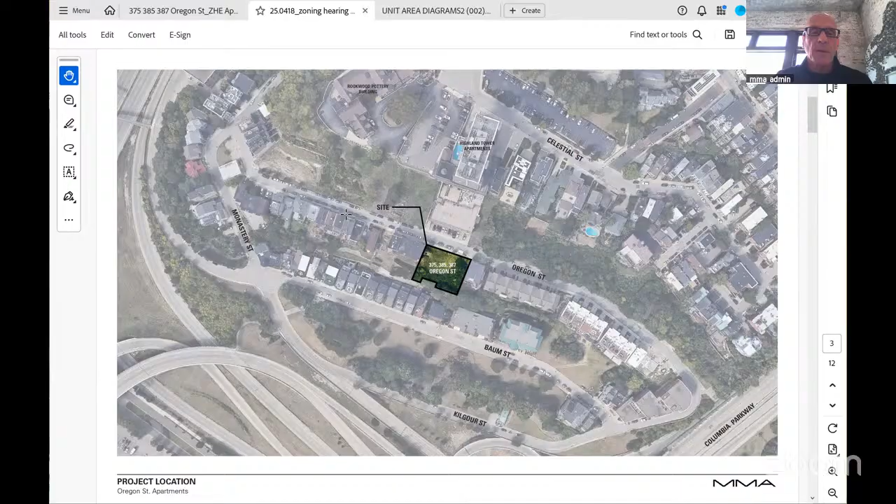So just orienting everybody from a site standpoint, we kind of all know where we are here on Oregon Street. The Highland Tower sits directly behind us, Baum Street is down below. I see we have some neighbors there on screen, and then Kilgour on down. So as was just beautifully explained from Athena, I think everybody kind of knows where we are and what we're talking about.

Getting down into the weeds a little bit from the zoning standpoint, this is where RM7 sort of starts and stops from an overlay standpoint, and then we go down to an RM2. For that purpose, from a zoning standpoint, it's just a matter of we are in the high density build area versus the lower or mid density building area further down on Oregon Street.

In general, just to give an orientation of how this sits in plan and on the site, Oregon Street is to the top of the screen up here. The general layout and massing of the building in plan is noted on the drawing, following the thick line. It's a bit abstract if you're not familiar with the building, which is still in design phase, but geared towards zoning approval first. We actually have three areas of entry into the building, each of which accesses 4 different units, which will then conform to the building code as far as the number of egress units permitted in one avenue.

So essentially, we have a large building mass overall, and it breaks down into two bigger towers that step off the street, and then one where you descend down between the masses and access 4 units down below.

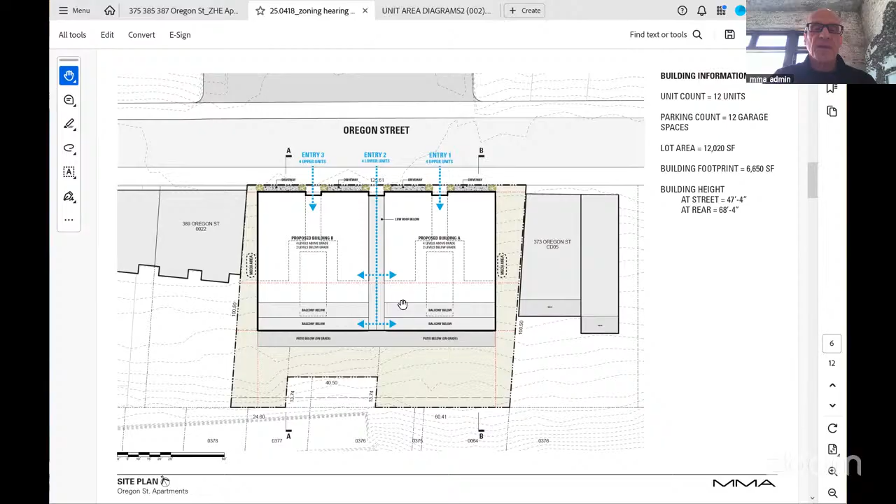From that standpoint, this shows, sort of removes a few things and shows the overlay. This highlights 2 of the conditions of relief. One is the rear yard setback, all the calculations noted here. The original position would have placed us here, which would have aligned more up with here, but certainly lost some space over here. So the averaging of this through the Hillside Overlay District, with both our staff, Brian Raymond and Matt Lascheid from the zoning department, and their algorithms, these were the numbers that were calculated and approved.

So we're looking for a setback that puts us into the zone so that we can build to here underneath. And then from a parking standpoint, another one of the items listed, the proposed aggregate width located here at 64 feet. I'll show you in a moment why we think that should be allowed. It's really because of how we're trying to make the buildings sit themselves on the street and how they address the street.

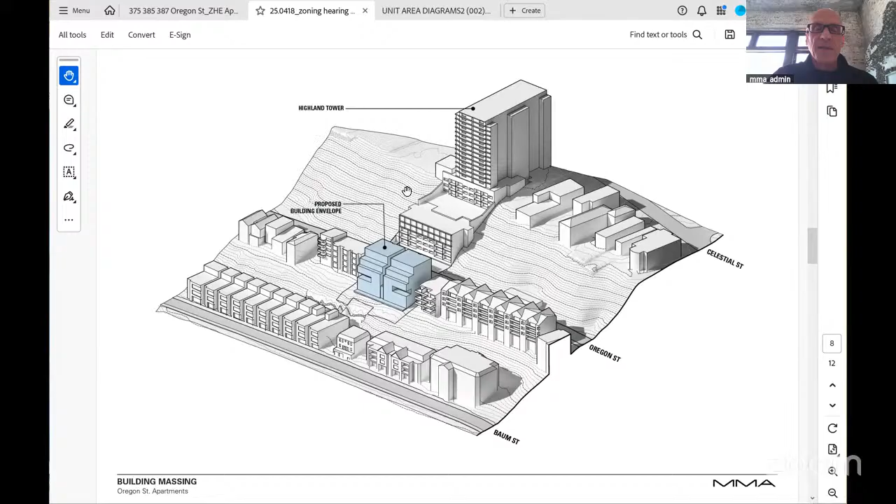So a little bit of an overview, just an axonometric. The proposed envelope is located here, pretty abstract early on, but this is about where the zoning heights and so forth are located and requested. You'll note behind us the Highland Tower, stepping down to, I believe, condominiums down there on Oregon Street.

From a street standpoint, to highlight again where we took what is essentially a larger building mass, the primary floor that is shared is the first floor off street. We've broken that down into 4 different access points for the vehicular condition, of which, and the issue of the dimension, the 64-foot dimension on the parking and drive access, this is cumulative. But we actually feel there's an advantage here, because where we set the massings now, as we break it down, it feels more like a row house on the street, matching up with some of the other ones further down in a different district.

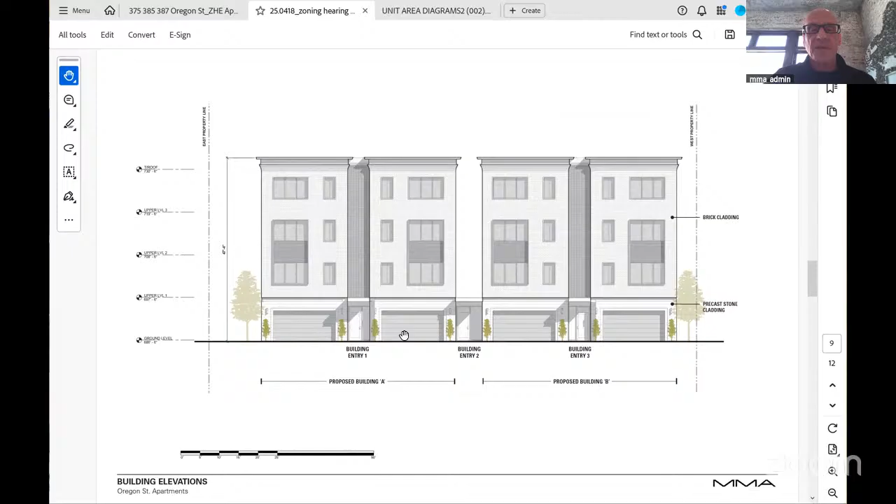And we broke up the parking access points as if they were singular row housing conditions. So again, 3 points of entry across the front. The center one goes down between and accesses the 2 lower levels of the units, and then the 2 sides go in and go up, 4 units per entry. A little bit of a developing section on the sides, so you can see where the setback takes you as far as the pullback goes. This is our request.

We feel from a sectional standpoint and the buildability standpoint, it actually is quite compatible with how the building steps down. This gets into our third issue, which is excavation. You can see the two sides of the site, the first purchase site and second purchase site, are slightly different in slope, which anybody that's been out there would see. You can see the original condition of the slope going down here, it's already excavated so to speak. I think it's 29 feet of cumulative cut, seems a little odd to calculate, but point being this is a very buildable site.

Our geotechnical report calculates that we probably don't even need piles. We can probably do this with spread footings, but that will be fully engineered and calculated out. So this is one section, off the street here. We have the garage access and the amenity floor as mentioned, and then you go up in certain units and down in certain units. The other half of the site is slightly different, and yes we are excavating a bit more in order to land this, but with no problems and full accessibility as far as we can see and know.

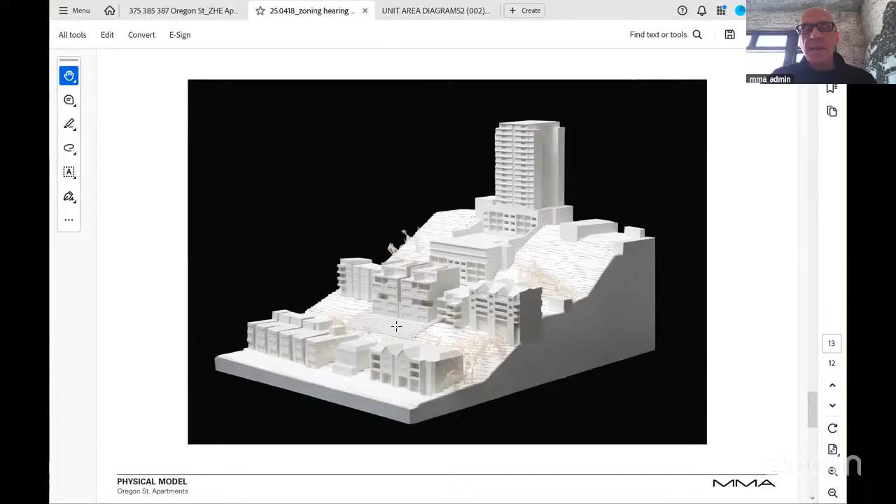We do taper the top floors back. So per the Hillside Overlay, it actually does conform and feel as if it's part of the site based on all of those original concepts and values based in the Hillside Overlay District. And then you move on down and access coming out the lower levels. And then just the last thing I'll show for now is just a few different shots of how the street works, what you're seeing from below.

And there you go. So

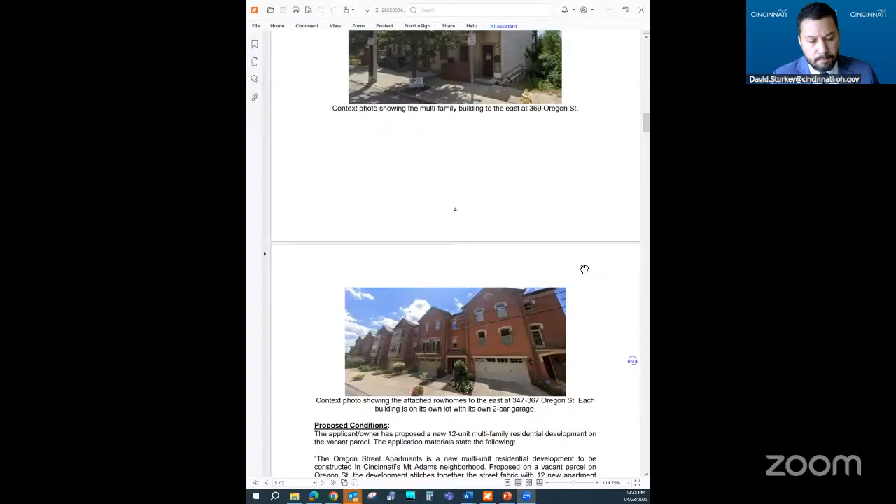The setbacks in the hillside are determined by averaging the two setbacks of the buildings on either side. And I can share, I have our staff report here. Let's see here. Is everyone able to see our staff report? Yep, okay.

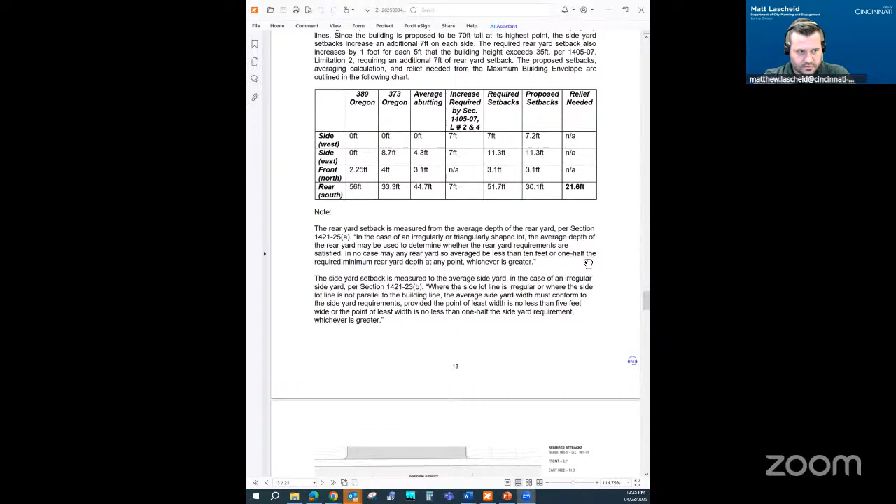Okay, so here's a matrix, and then here's the site plan, which is probably the most helpful. The zoning code requires that the rear yard setback be the average of those on either side. So we take this on the right or the east, and this on the left or the west, and we average them. This site faces kind of an odd condition where there's this bump out that goes into the property. So the rear yard setback for an unusually shaped lot is the average, which Mr. Messerly and I determined was here based on how much width was at the deepest point versus the shallowest point. And then we measure the average of these two setback numbers, and I believe that it's shown on this red line here as the average.

And they're requesting a variance to let the building go further into the backyard than the zoning code would typically allow. I think it's worth noting that in practicality, it's about in line with the building to the east, but there's somewhat of an unusual condition with this bump-out here that skews that dimension.

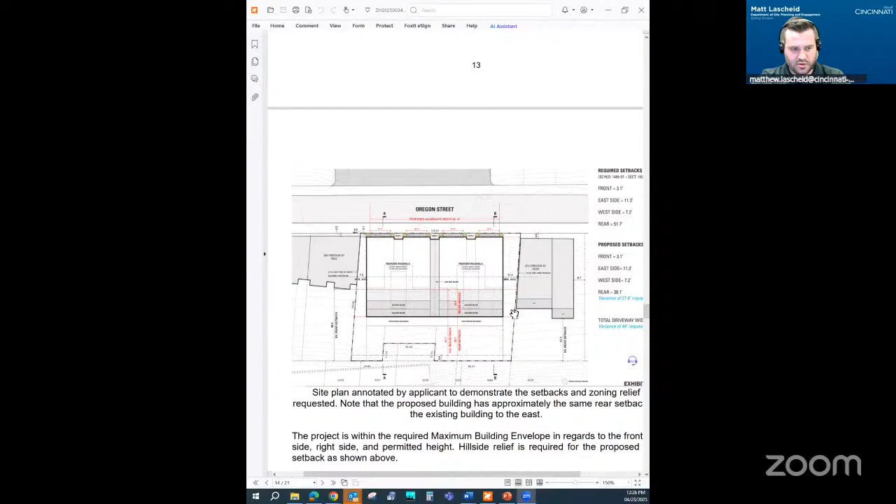And then also there is relief being requested for the amount of excavation and fill for the project. The Hillside Overlay District limits excavation and fill to 8 feet before a hearing is required. And then during the Hillside review hearing, we review the project for compliance with the Hillside Development Guidelines.

One of the main emphasis is that the building should be stepped to follow the natural topography. Both the foundation should be stepped down the hill so you're not excavating large amounts of earth or filling large amounts of earth and building a big retaining wall. Generally, the building should be designed to fit onto the earth where it's proposed.

And our analysis has determined that that is the case. You can see that although it's a cumulative 29 feet, which sounds like a lot, that is to be expected for a project of this size. And as outlined earlier, large multifamily buildings are permitted in this district. And generally, the foundation has been designed to step with the hillside as is intended by the zoning code.

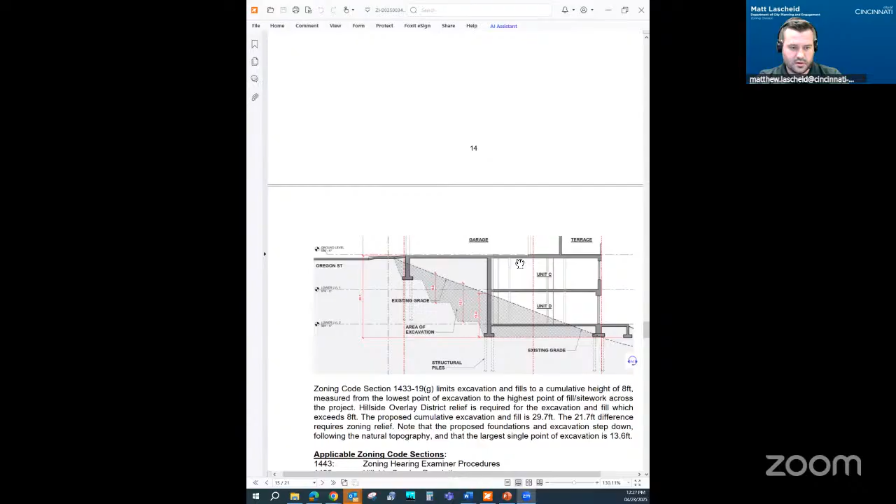And then the third piece of zoning relief that's being required is the aggregate driveway width of 64 feet. The zoning code typically says that you can only have a driveway or total number of driveways that are 20 feet. And a variance is being requested to allow the applicant to have 4 separate driveways that are 16 feet each.

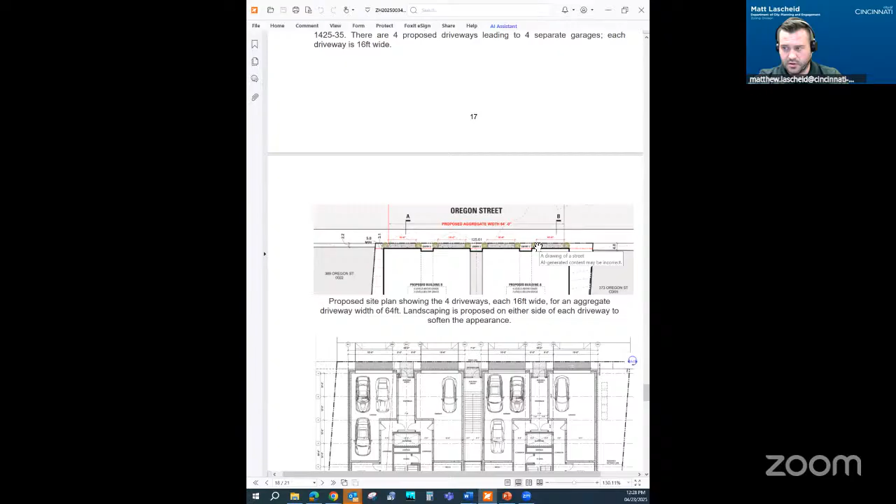And this creates a condition that looks kind of like a series of row houses, which is a common condition in Mount Adams and would otherwise be permitted if each one was on its own parcel.

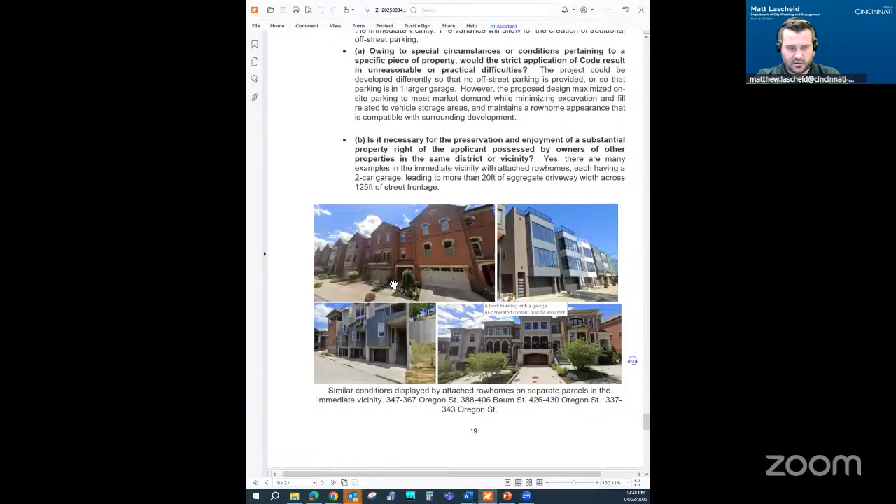However, that's not the case here. But it would be allowed if they were on their own parcel, and we've identified there are several properties in the immediate vicinity that have a condition very similar to what's being proposed here, with multiple driveways up against each other. The only difference is that there are property lines running between them, which is not the case here.

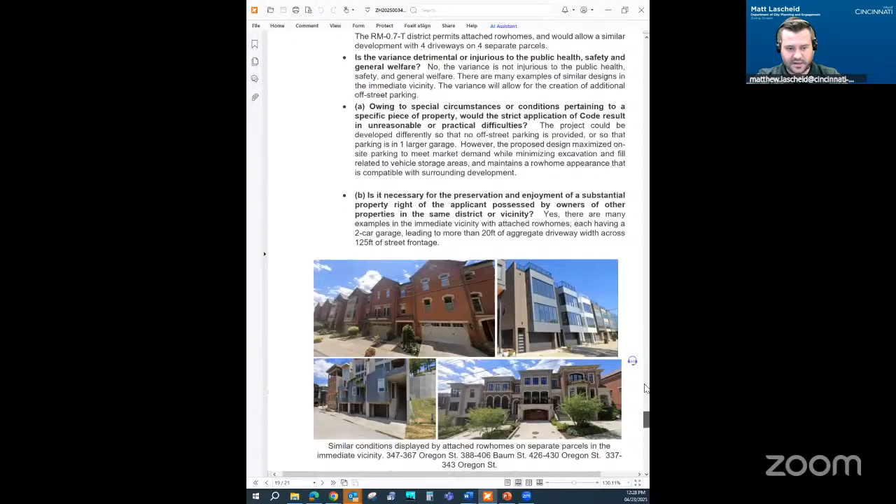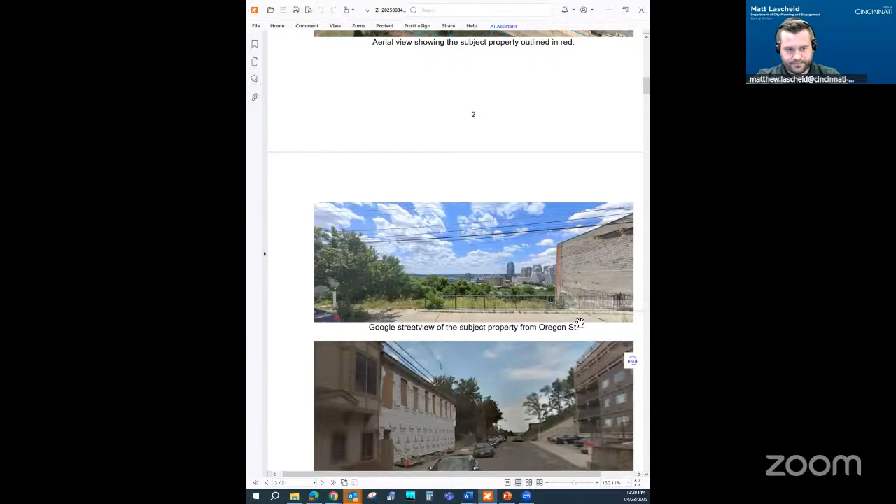But what's being requested would result in buildings that look like a series of row homes, similar to other homes found in Mount Adams. And the variance just is to allow for each one to have a driveway and a garage, which is a common condition and would be permitted if there were property lines running down the middle.

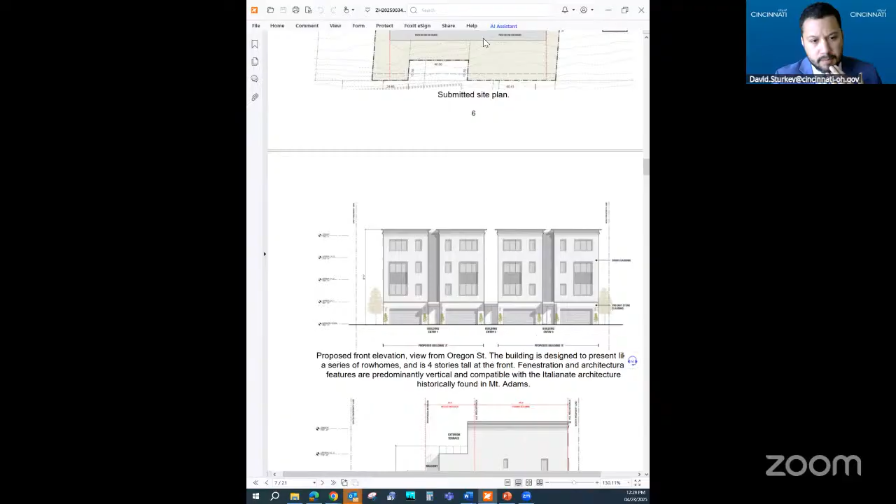Mr. Weinstein, hopefully that helps clarify the relief that they're requesting here today. Did you want to add some comments?

Got it. So your concern is with the rear setback and the minimal footprint. All right, and that's mostly based on your fears about hillside stability, is that right? It's happened all around here—just recently, several landslides, and on our street particularly.

All right. Anything else you'd like to add? That's it for right now.

Okay, I'm gonna go a little out of order and I'll give MMA Design, or MMA at McInturf, if you want to respond to that before I go to Mr. Vogel—I think that just might be a more logical way, if you wanted to respond to that comment or address that at all, before going to Mr. Vogel. Yeah, I'm fine with that. I think get this up here. Oh, there it is.

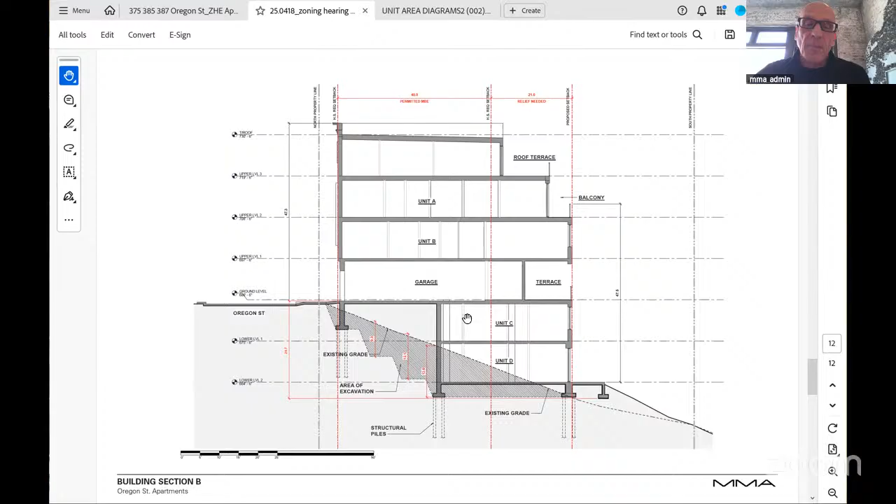Structurally, despite the fact that we're well aware of what's going on there, even in our analysis through our geotech—forgive us, he had an emergency this morning and cannot be here—we've calculated that we may not need piles to drive down further, but if required we're certainly prepared to do that. The layout of the plan is geared so that structurally we'll have primary walls running perpendicular to the loading of any sort of slippage from a retainage standpoint. So there's really nothing we're too concerned about, knowing where we are.

Pulling the base out actually allows us to utilize more of the site. In plan, as Matt mentioned, it conforms in general to about as far out as the building next door is. As we taper at the top, it gets a little greater over here—we taper that out from the top so that there are views coming out, so you can actually see over to the river and so forth.

So we're very confident there will be no slippage on this. It's actually easier to go deeper and build out that lower level than it is not to.

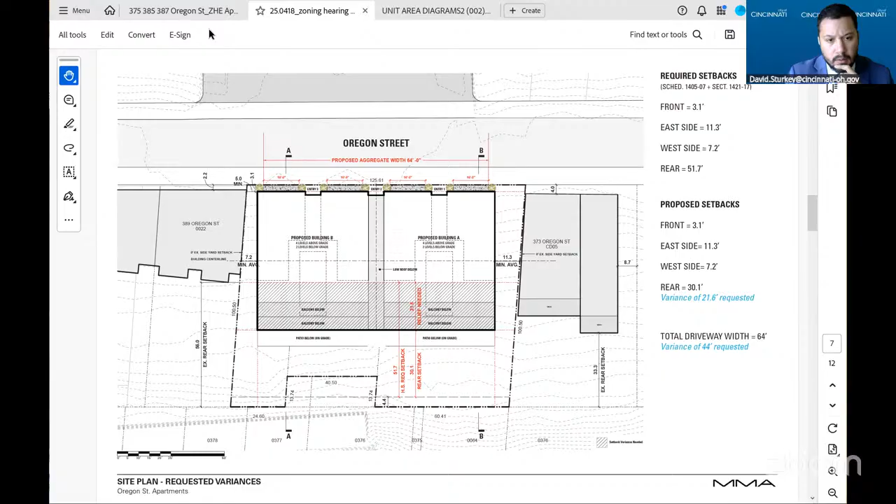Okay. I'm going to shift over to the Mount Adams Civic Association and their representative, Mr. Vogel. Did you want to add some public comment here?

First, I'd like to thank both the owner and the architectural firm. They've been very accommodating, meeting with us a number of times and responding to our questions and concerns. To be brief, we have no objection to the project as presented, with one caveat, which came up today—Mr. Rashid was talking about this with respect to that nominal variance for the driveways, because the number is somewhat startling, and we wanted it referenced, if we could, in any written report or order in response to this hearing, that this property, as mentioned in the staff report, is actually a unified 3 lots.

So with respect to the driveway, we're talking about property lines. There were property lines there—I don't think they've officially been erased, but they are gone, and that allows this project to be presented. But each one of the 3 lots could have had 20 feet on it. So I would request, on behalf of the Civic Association, that the anomaly of the fact that this is now one parcel be noted with respect to the driveways—which, again, we are in favor of, because providing off-street parking is important given this is a densely built, narrower street, and parking on Oregon is very constrained right now. So there are reasons for what is being designed.

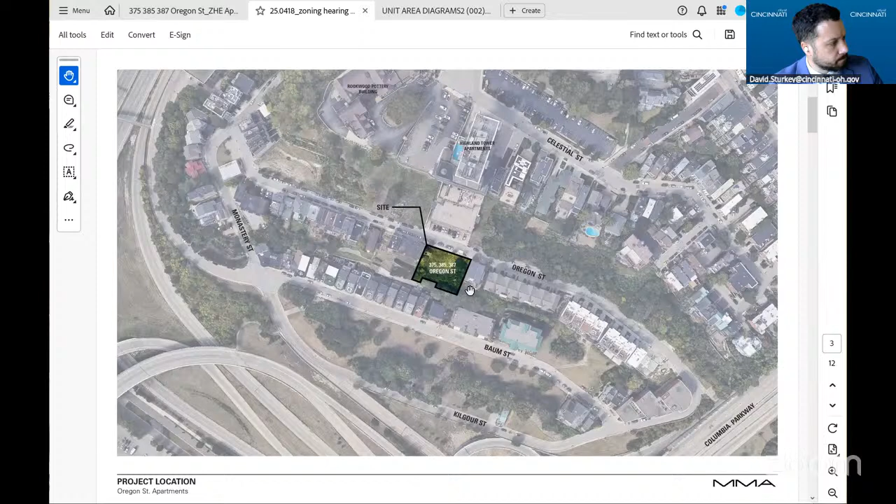Right, thanks. Generally, in a larger context, the proposed building is, I feel, compatible with the rear yard setbacks. It is not significantly out of scale with other buildings in that respect.

And then lastly, we look at the excavation and fill that's required. As noted earlier, generally the zoning code limits that to 8 feet before a hillside review hearing is required. At that point, we look at whether the building is designed to step with the hillside, whether it's designed to minimize excavation and fill—so there's no large cuts into the hillside, no large retaining walls being proposed. Sometimes that would be the case if someone was proposing a parking area that needed to be flat, then they would level it out with a big retaining wall at the end. That's not the case here.

Parking has been designed within the building and accessible from grade. There are some excavations required for the foundation, but they step down naturally with the hillside. There are no substantially large excavations or amount of fill being required here. So our staff's position is that this project aligns with the hillside development guidelines, and we recommend approval.

Is there a proposal for any retaining walls as part of this project? Not that I would call a retaining wall. I mean, there's some site work at the back for a patio, but I wouldn't call that a retaining wall.